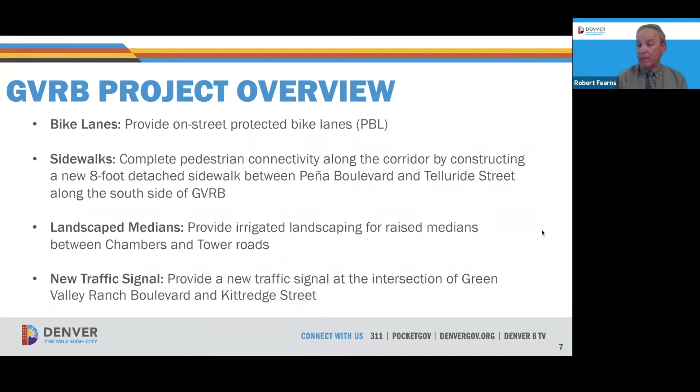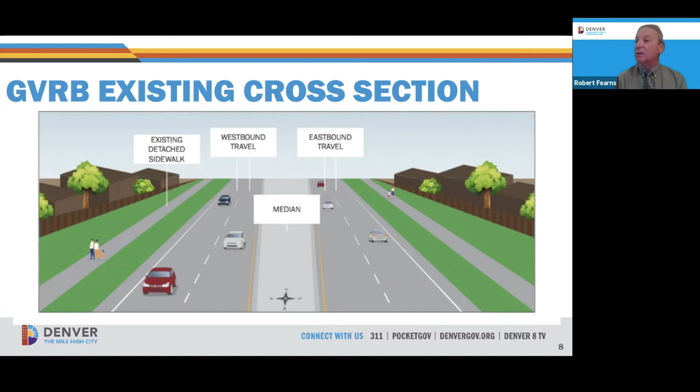Okay, here we go. Let's take a quick look at the existing cross section of Green Valley Ranch Boulevard, just to visualize what I described. Today's existing condition has a fairly wide median in most of the roadway and 2 vehicular travel lanes in each direction, east and west. For the most part, there are 8-foot wide detached sidewalks throughout the corridor, except for that one stretch between Pena and Telluride. Let's take a look at what our proposed configuration will be.

So what we're proposing to do is take that wide median that's in the middle, narrow that up, shift our vehicular travel lanes to the inside, and that will free up some space on the outside of the existing roadway for the introduction of the protected bike lanes.

I think it's interesting and important to note that we're not planning to widen Green Valley Ranch Boulevard to execute any of these plans. It's simply utilizing that existing space that we have today.

And then, as I mentioned before, we will be adding the detached 8-foot wide sidewalk between Telluride and Pena Boulevard. And that really summarizes our project.

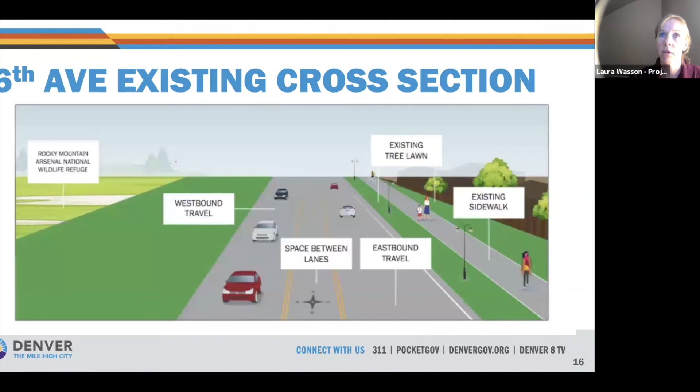This slide depicts what is out there right now. As you can see, there's an existing path on the south side of 56th. You have one lane in each direction, as well as a turn lane in between the two travel lanes. On the north side, you just have the open space and then the Rocky Mountain Arsenal. Next slide.

So all of that sounds great. Now you want to know when we're going to give it to you, right? Any day now we will be releasing the RFQ, which is a request for qualifications. This is for contractors and design consultants to submit their qualifications to be able to perform the project.

In early 2021, we will take all of the RFQs we receive and shortlist those, inviting a few select teams to participate in the request for proposals. That will be in early 2021, and the RFP process will take a few months. We expect to award the contract in fall of 2021 - a little less than a year from where we are right now.

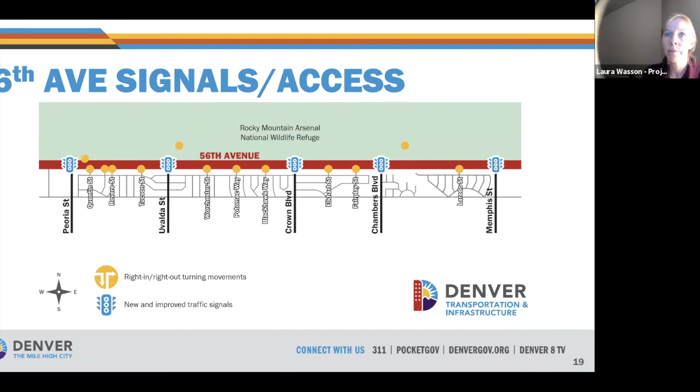And then coming down the line, not part of this project, there will be a new bike and ped facility on Peoria Street as part of a separate project, but that is coming soon. So, next slide.

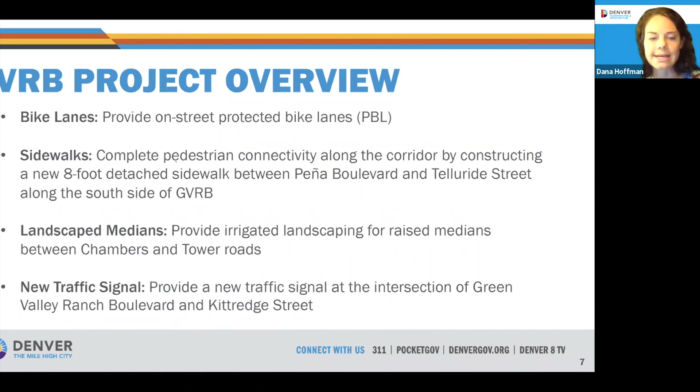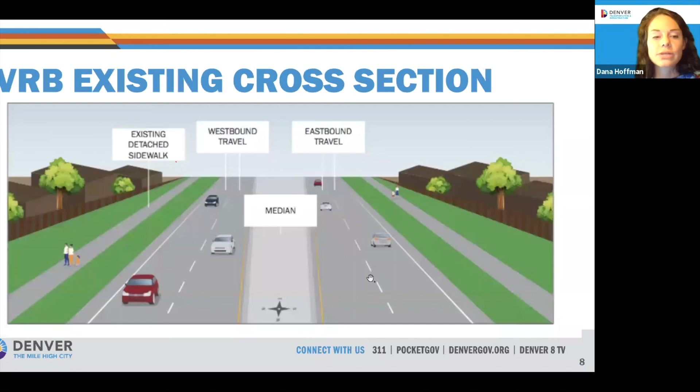And we'll learn that as we go through the design, right? Correct, yes, and get a contractor on board. Okay, so yeah, stick with the web page. We'll try and keep that updated as we know more about the final design and the project schedule as we get that information.

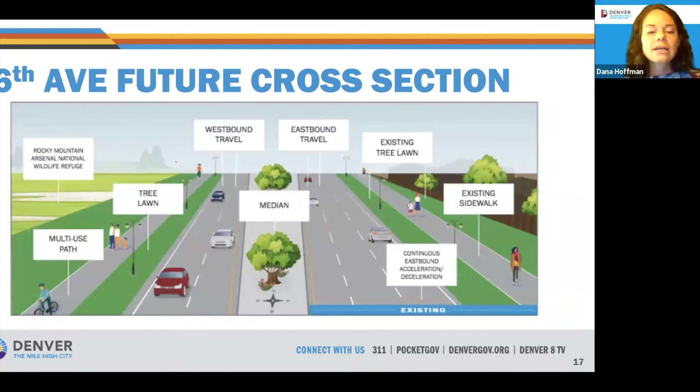All right, question here from Michael. Is this session being recorded? And will it be available to review later? Yeah, Michael, so we always provide at least a summary on the webpage. We'll talk to the project team to make sure that all that information is available for you.

All right, looks like we have another question that maybe came in. Yep, here from Jeff: I'm primarily wondering about the traffic signal at Kittredge in terms of timing. Yep, so Deb, are you able to field that? Is that the one at 56th? Then I'm not sure exactly which one we're talking about. This would be the proposed traffic signal at Kittredge and GVR.

Bob, you might have to help me with this one. I don't know if that is part of this project. Is that part of what you're designing with this project? It is. We are planning on putting a signal in, or at least designing one, at Kittredge and Green Valley Ranch. I think the timing of that would be somewhat as Deb described, based a lot on available funds and how that fits in with the overall scheme for construction along the corridor. But I don't have any other specific information than that.

We can certainly look at the schedule and the funding and give an answer to that one as soon as we can, probably by the end of the year or in the first quarter of 2021. Jeff, feel free to unmute if there's more to that question. Hopefully that answered it for you. Oh, I think that answers it as best as you guys are able to now. Thank you. Yeah, just stick with us as we go through design, we'll learn more about that.